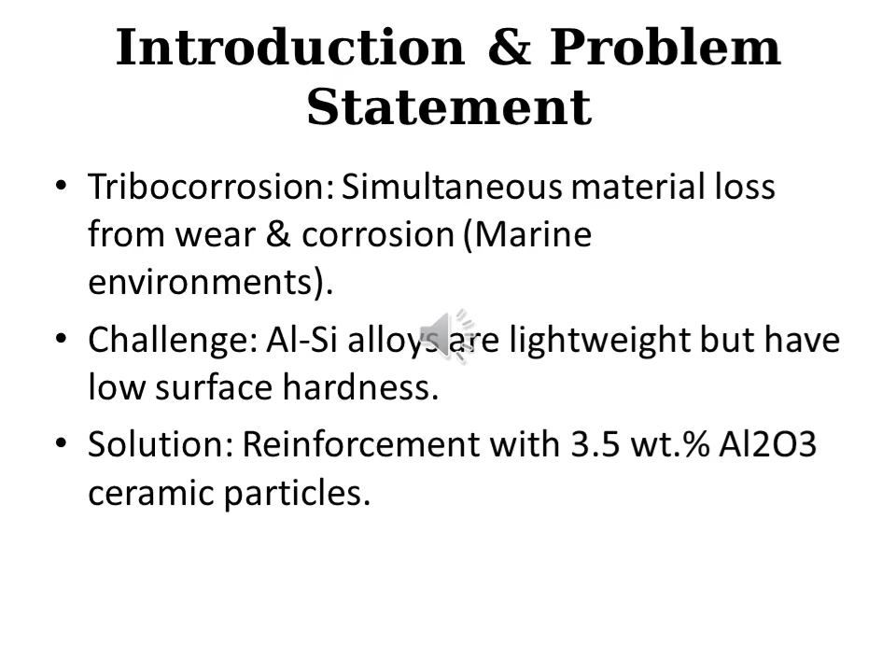Our research objectives are fourfold. First, to fabricate these aluminum-silicon matrix composites using the stir casting method. Second, to analyze the microstructural distribution of the particles. Third, to evaluate the corrosion resistance in a 3.5% sodium chloride solution. And finally, to determine the synergistic material loss, or the tribocorrosion behavior.

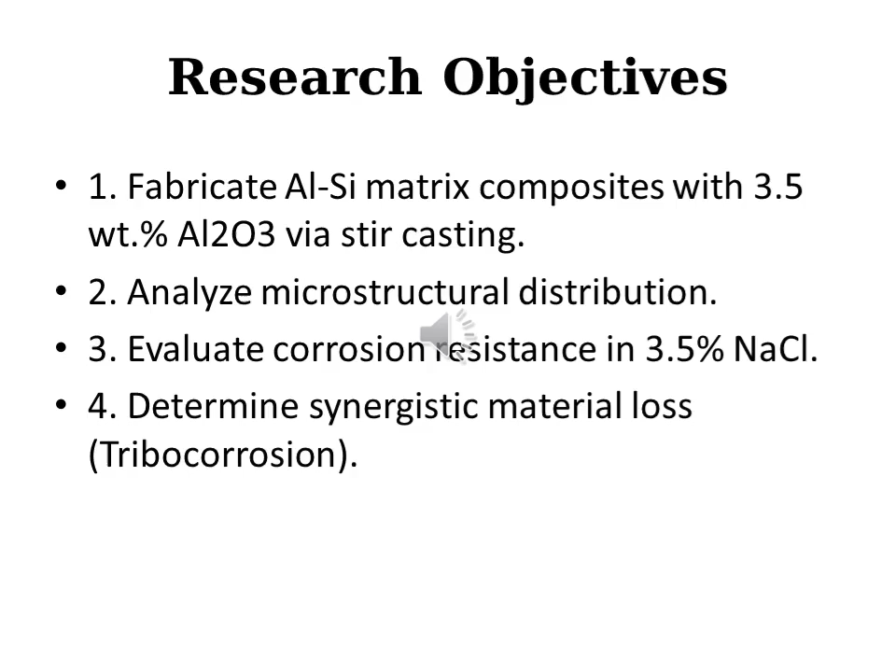In slide 4, materials and methods. Moving on to our methodology, we used stir casting at temperatures between 750 and 780 degrees Celsius for fabrication. For testing, we conducted dry sliding wear tests using a pin-on-disc setup according to the ASTM G99 standard. Electrochemical behavior was analyzed via potentiodynamic polarization, and the tribocorrosion behavior was evaluated using an integrated sliding corrosion test per ASTM G119.

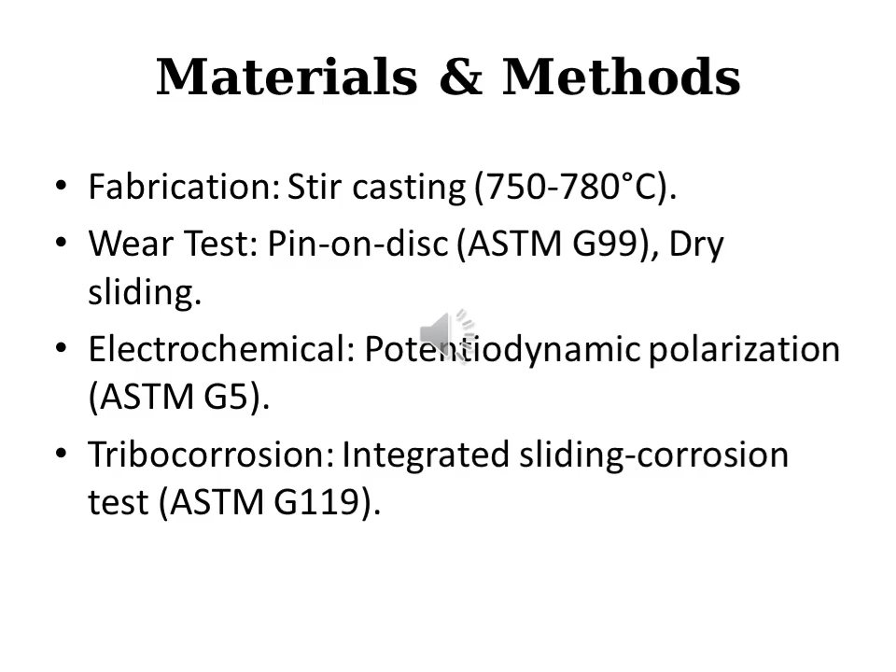In this slide, moving on to our findings, let's first look at the microstructural results. As illustrated in Figure 1, the SEM micrographs clearly show a uniform distribution of alumina reinforcement particles within the aluminum-silicon matrix. This uniformity is crucial for consistent material performance. Furthermore, the image reveals that we achieved strong metallurgical bonding between the ceramic particles and the metal matrix.

Fortunately, we observe no significant agglomeration or clustering of particles, which indicates the effectiveness of the stir casting process we employed. If you look at Figure 2, which shows the worn surface, you can observe specific wear mechanisms such as abrasive grooves and micro-delamination, alongside pitting corrosion shown in image C. This visual evidence helps us to understand the physical degradation of the material.

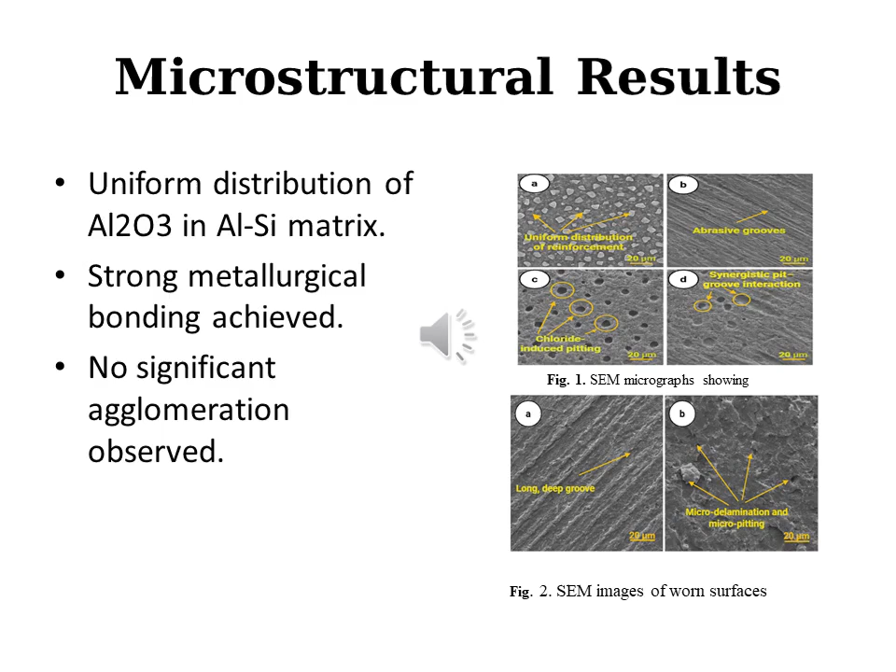In Slide 6, wear behavior results. Regarding wear behavior, the hardness increased with the addition of reinforcement. As you can see in the data, the hard ceramic particles resist plastic deformation. Comparing the unreinforced alloy to the composite, the wear rate was reduced significantly. For example, adding 15% alumina reduced wear by 59% compared to the unreinforced alloy. The specific wear rate dropped from 4.85 to 1.98 times 10 to the power of -4.

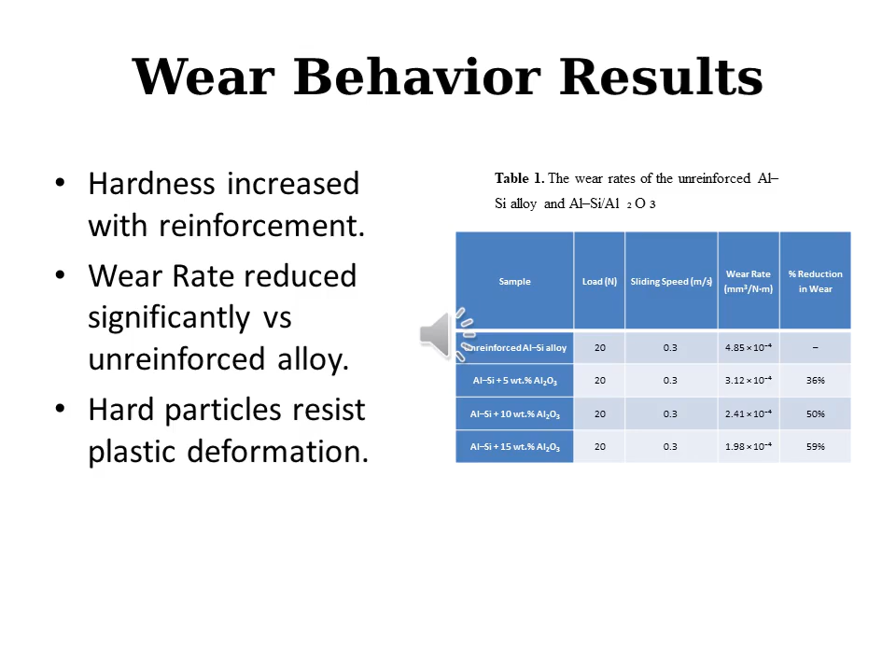In Slide 7, corrosion performance. In terms of corrosion performance shown in Figure 3, the corrosion potential curve shifted to more noble, positive values with the reinforcement. The current density decreased significantly from 13 down to 6.3 microamps per square centimeter, indicating improved polarization resistance.

In this slide, let's analyze the corrosion performance, which is a key part of this study. Looking at the potentiodynamic polarization curve in Figure 3, we observe significant improvement. The corrosion potential shifts towards more noble, positive values for the reinforced composite compared to the unreinforced alloy. More quantitatively, the current density, or i_corr, decreased dramatically. It dropped from 13 down to 6.3 microamperes per square centimeter. This reduction is a direct indicator of a slower corrosion rate. This data confirms

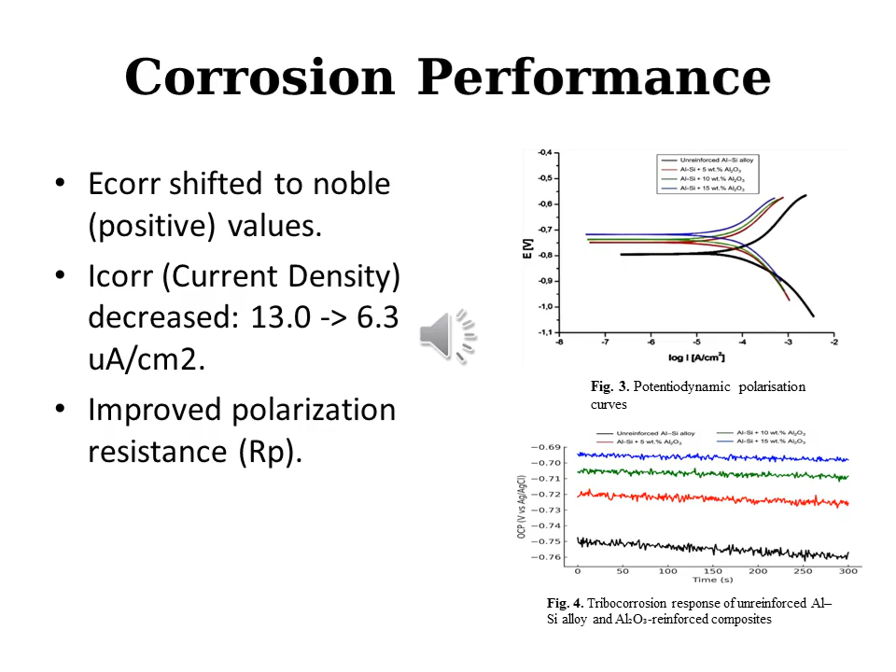In slide 8, tribological and synergistic effects. Now discussing the core of this study: tribocorrosion. We calculated the synergy factor S. For the unreinforced aluminum-silicon alloy, S was greater than 1.5, indicating high degradation. However, for the composite, S dropped to approximately 1.1. This proves that the reinforcement effectively mitigates the accelerating effect that wear usually has on corrosion.